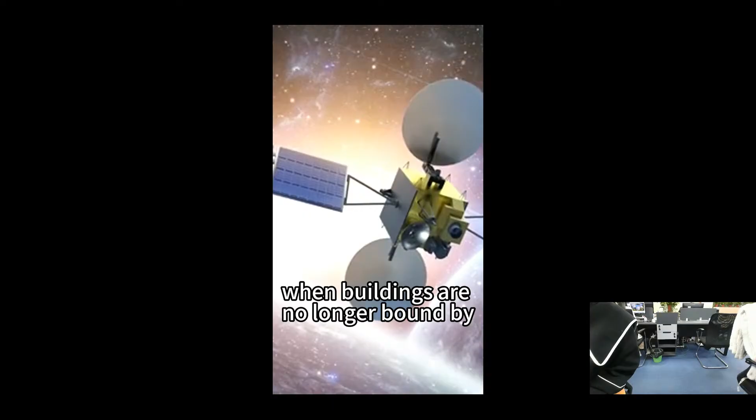When mankind's imagination of space breaks through the boundaries, when buildings are no longer bound by traditional structures, how to use the skeleton of steel to hold up freedom up to 100 meters. From industrial factories to stadiums, from transportation hubs to cultural landmarks, LF has been deeply engaged in the field of steel structure and mesh frame for 30 years.

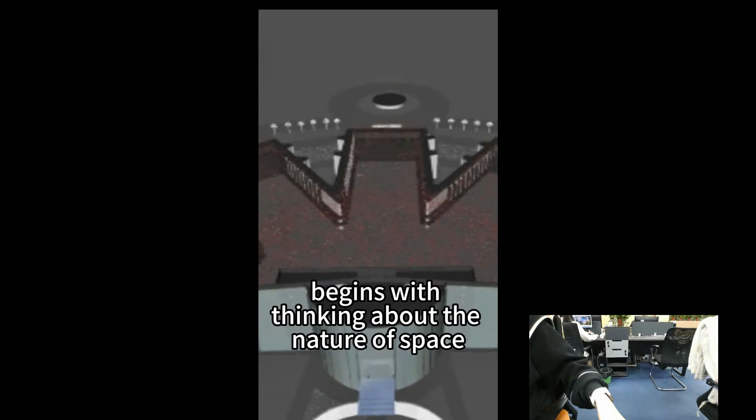We believe that true architectural innovation begins with thinking about the nature of space, removing redundant columns, and restructuring the balance of force and beauty with precise calculations. Each design proposal is a redefinition of extreme span.

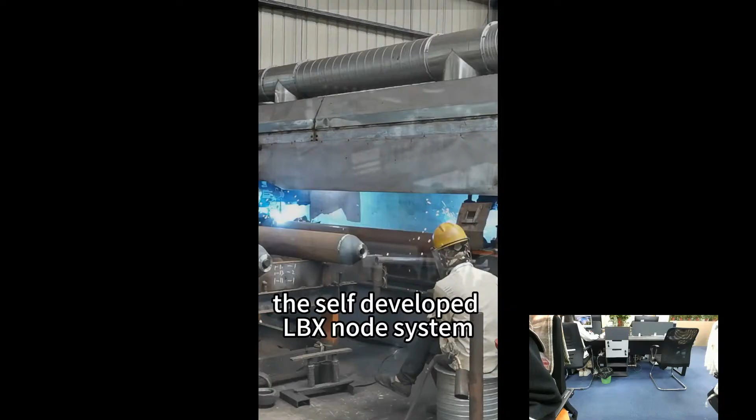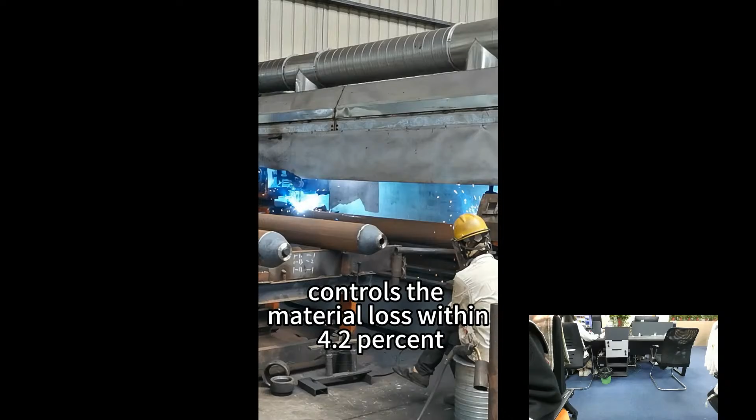The self-developed LBX node system has a bearing strength of 1.8 times that of the traditional process, and the BIM full life cycle management system controls the material loss within 4.2%. This is not only cold parameters, but also our dedication to lean construction, to make every gram of steel carry the mission accurately, and to make every curved surface imply structural rhythms.

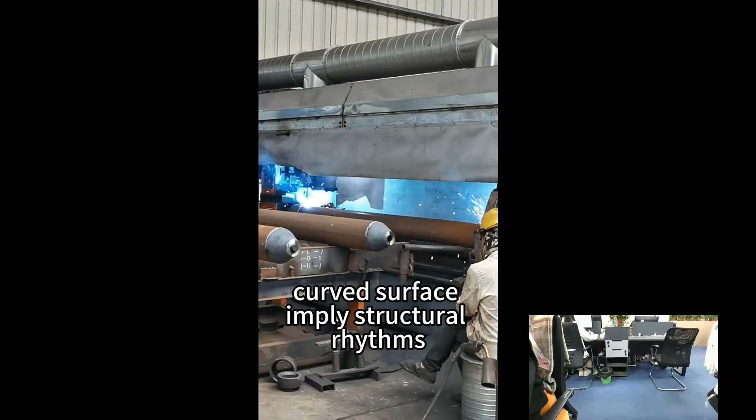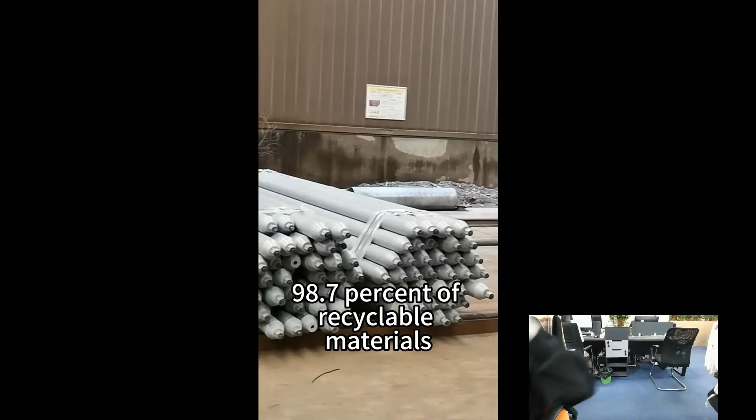When sustainability becomes a necessity, LF's green formula is rewriting the rules of the industry: 98.7% of recyclable materials, 30% reduction in overall energy consumption, and 65 years of full life cycle design. We are proving that the toughness of steel and the gentleness of ecology can be symbiotic and co-prosperous.

From conceptualization to operation and maintenance, what we build is not a simple supplier relationship, but a value alliance across the whole life cycle of the building.

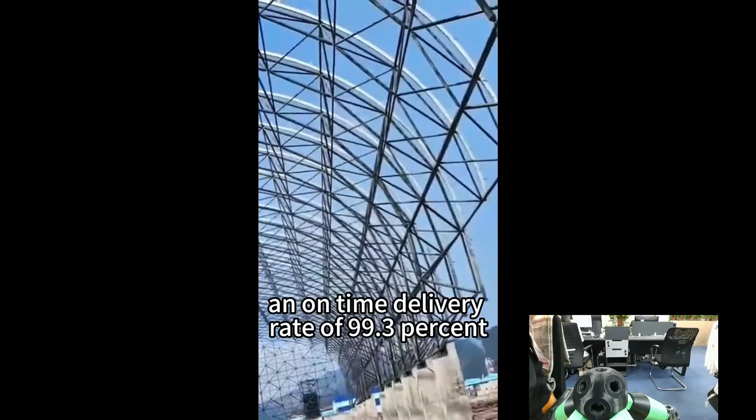217 landmark projects around the world, an on-time delivery rate of 99.3%, and a lifelong traceable digital archive—behind these figures is LF's solemn commitment to architectural timelessness.

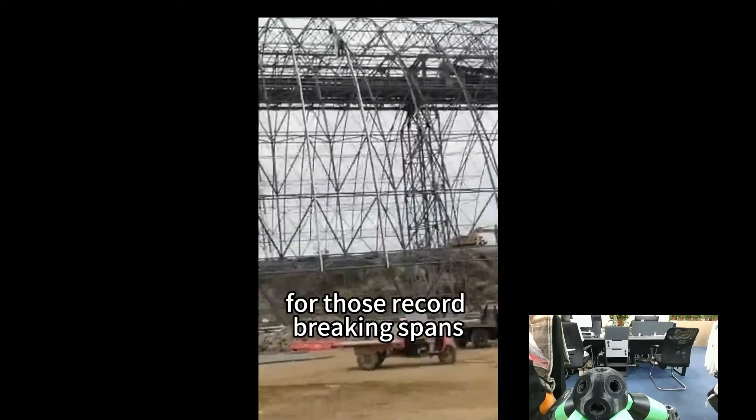When future architects look back on this era, LF hopes to be remembered not only for those record-breaking spans, but also for our consistent perseverance writing spatial poems with steel structures and pouring eternal promises with the spirit of innovation.

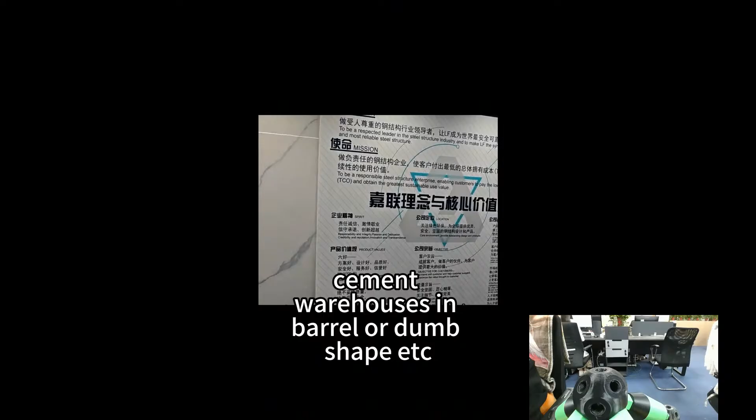LF is especially professional on large-span space frame projects, such as cold storage and cement warehouses in barrel or dome shape, etc. Comparing with traditional H-type steel structure, space frame with large span has more advantages such as more stability, beautiful appearance, and saving cost.

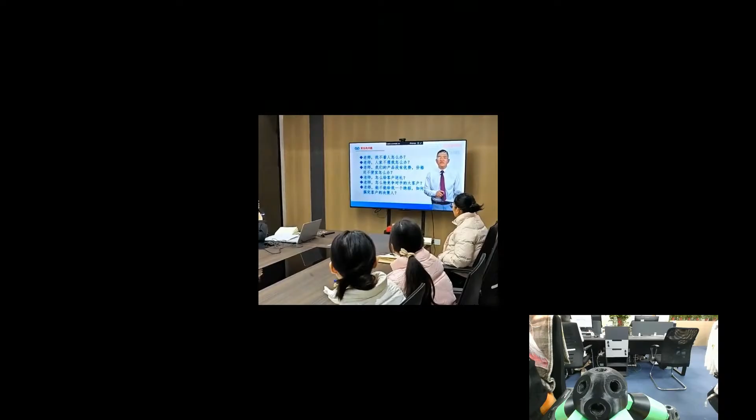LF has been recognized internationally for its expertise in design and construction of space frame structure, domes, and freeform structures, with all products compliant with sustainable building requirements.

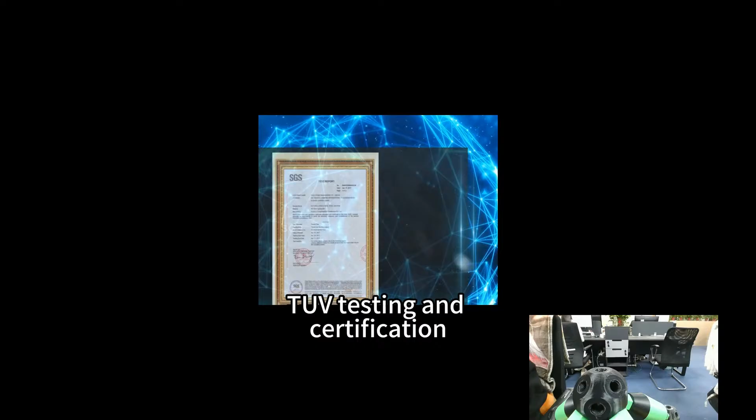Our products comply with SGS, BV, TUV testing and certification, as well as SGS-provided welding process in line with the AWS evaluation. If the customer has other needs of documents and certifications, our documentation staff will further implement the cooperation.

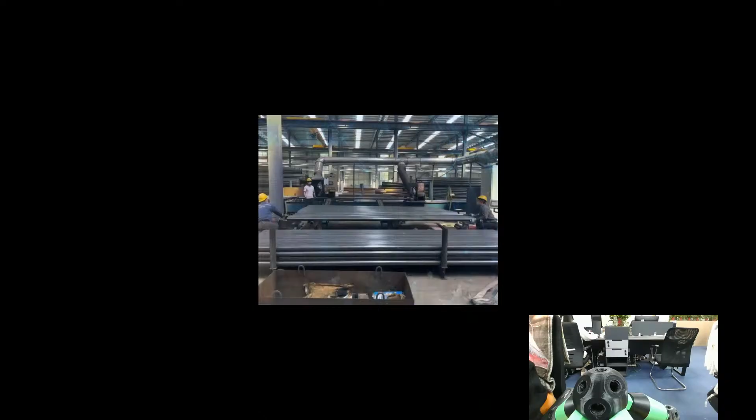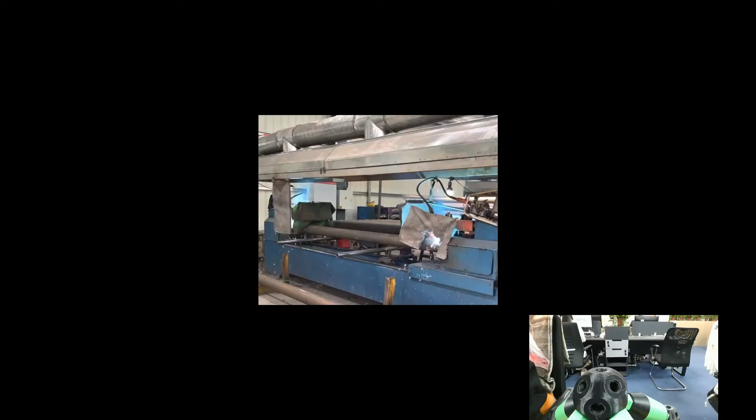All production is completed in the factory, and the components are miniaturized to facilitate transportation, avoiding welding and processing on site as much as possible. Most of our products adopt a small number of welding or other treatment methods. The installation period is shorter, and the requirements on workers are lower. Factory manufacturing can avoid the safety hazards of on-site welding.

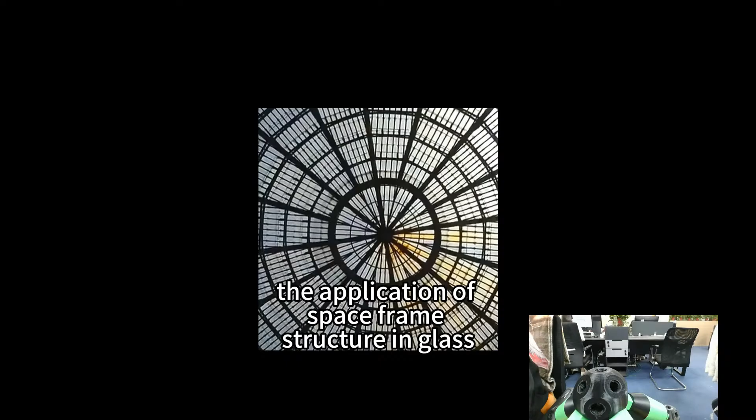Application of space frame structure in glass dome skylights is mainly reflected in its lightweight, efficient load-bearing capacity, and aesthetic visual effect. As the dome skylight needs to cover a large area and bear a large load, the space frame structure can provide evenly distributed force transmission while reducing the weight of the overall structure.

Efficient load-bearing capacity, open space, and flexible design make space frame structures widely used in hangars. The space frame structure has a superior spanning ability, which enables a large span of space in the hangar without interference from columns, and facilitates the parking, maintenance, and operation of aircraft.

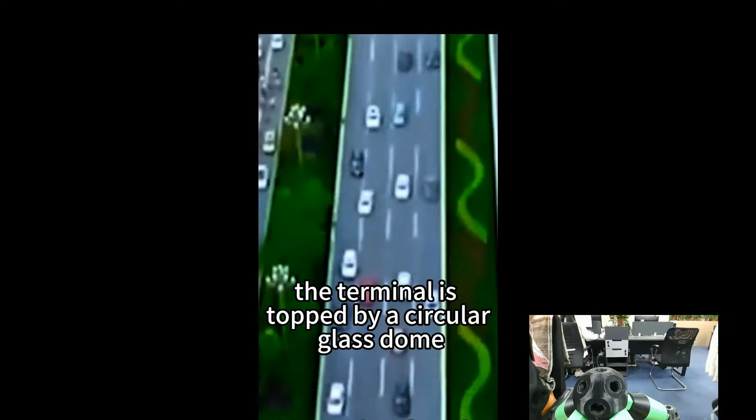The terminal is topped by a circular glass dome, 80 meters in diameter, surrounded by 8 huge C-shaped columns that hold up the entire terminal roof.

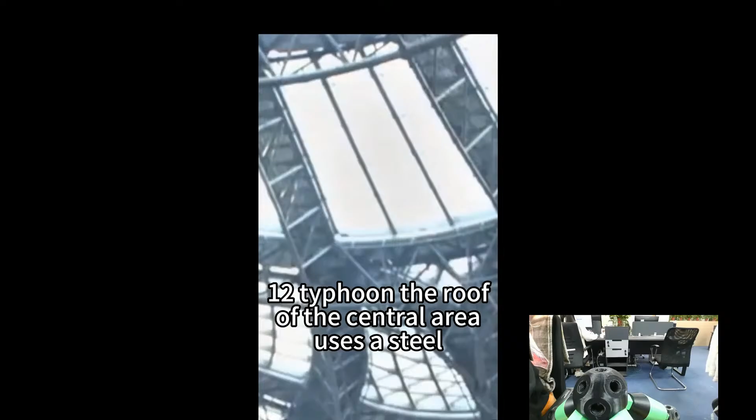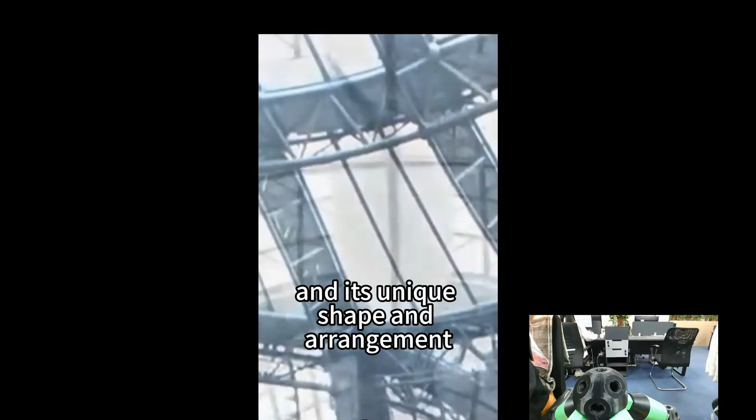These C-shaped columns are surrounded by bubble windows, which are mainly used for lighting and enable the terminal to withstand a Category 12 typhoon. The roof of the central area uses a steel space frame structure, supported by 8 C-shaped columns, 12 groups of support tubes and curtain wall columns, forming a large span roof of 180,000 square meters. The C column is the main support structure, and its unique shape and arrangement effectively transfers loads, providing both vertical support and horizontal stiffness.

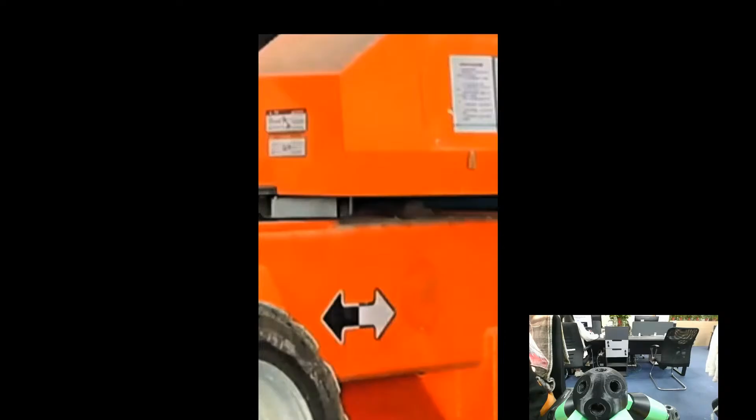Stepping into the museum is like traveling through multidimensional space. The well-arranged space layout is not only the ultimate pursuit of architectural aesthetics, but also a deep tribute to the history and culture of the exhibits. At every step, you can feel the integration of history and modernity. The unique space frame design makes every corner of the museum full of surprises.

The cantilever roof and the staggered beams and columns not only support the weight of the building, but also bear the crystallization of human wisdom. Every detail is a profound interpretation of architectural art.

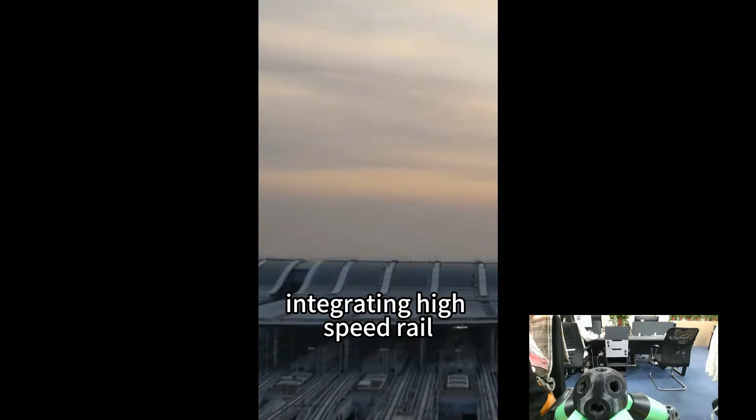Xiong'an High-Speed Railway Station is a comprehensive transportation hub integrating high-speed rail, intercity railway, subway, bus and other modes of transportation. In the video, it can be seen that the platform layers are scattered, and the high-speed train shuttles through them like a silver dragon, efficiently connecting Beijing, Tianjin and other parts of Hebei province, greatly shortening the time and space distance between the cities.

The supporting facilities in the station are perfect, from intelligent security check, face recognition, to automatic ticketing, information query. Every detail reflects the humanistic care of science and technology, which provides great convenience for passengers.

The steel structure project of Xiong'an High-Speed Railway Station is a frame structure system with a total steel consumption which exceeds the total steel consumption of the Bird's Nest stadium, and is the leader in the steel structure consumption of large domestic transportation hubs.

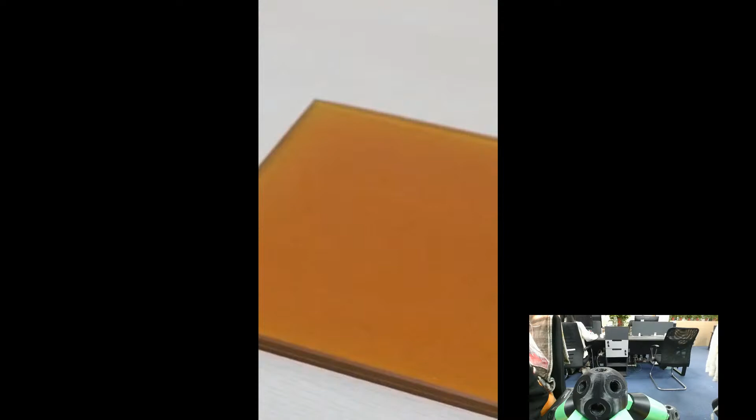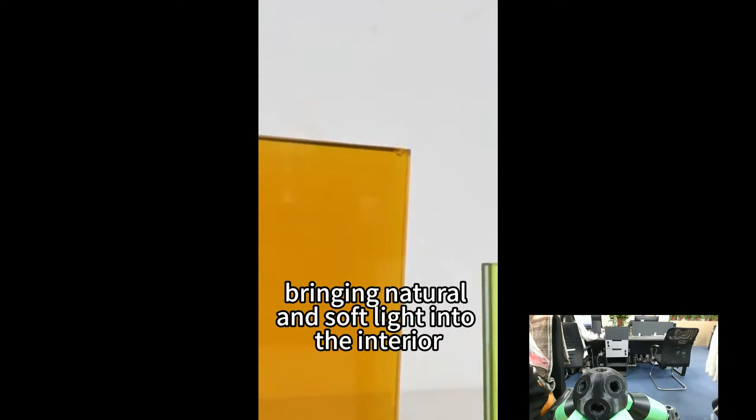Glass dome is usually made of tempered laminated glass, ultra-white glass and other high-strength, high-light transmittance materials with high transparency, good appearance, lightweight and other advantages. The glass dome is able to change with the skylight, bringing natural and soft light into the interior while reducing the use of indoor lighting and air conditioning, saving energy.

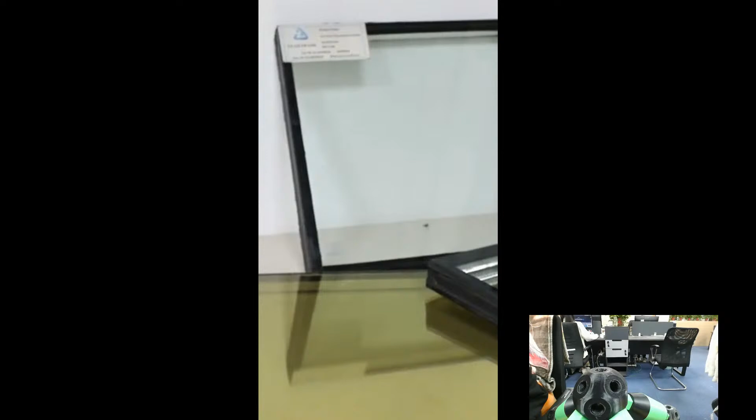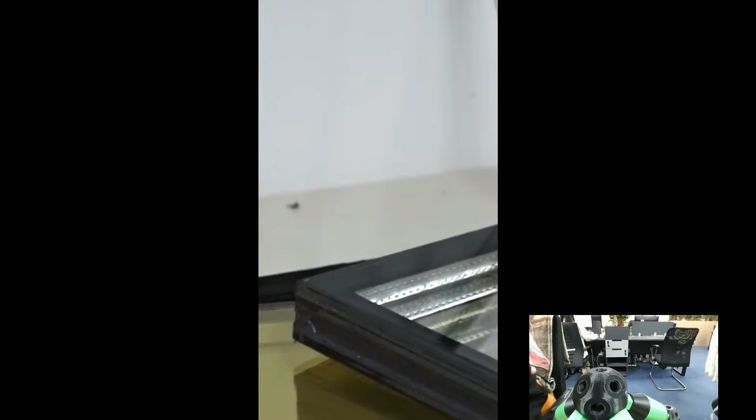Now let's look at some of the details.

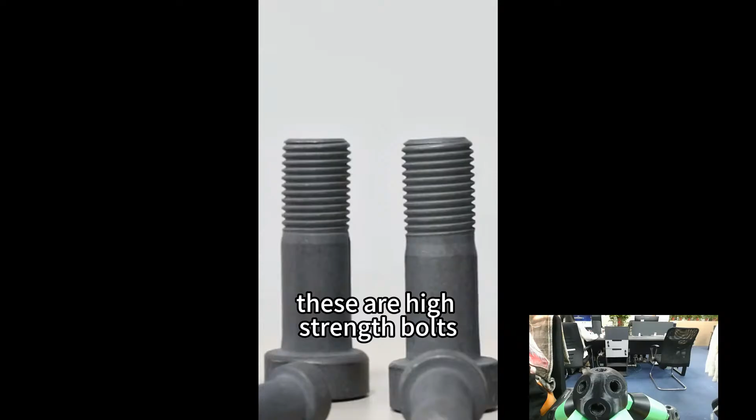These are high-strength bolts. The role of high-strength bolts in the space frame structure is mainly reflected in the connection fastening and enhancing the overall stability.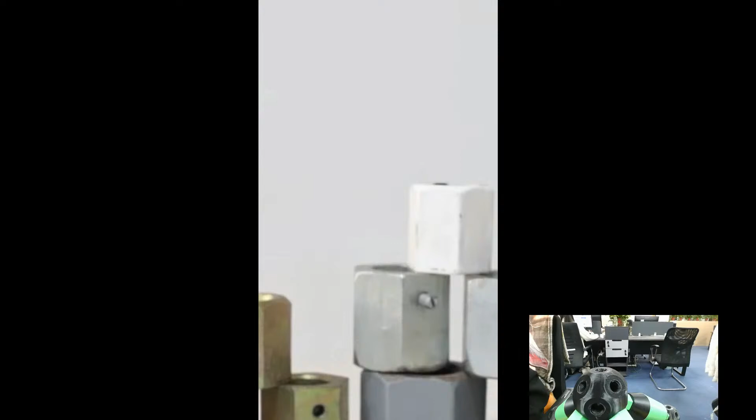These are sleeves. The sleeve is mainly used to connect the steel bar, which is to connect two or more steel bars through the sleeve to form an overall structure.

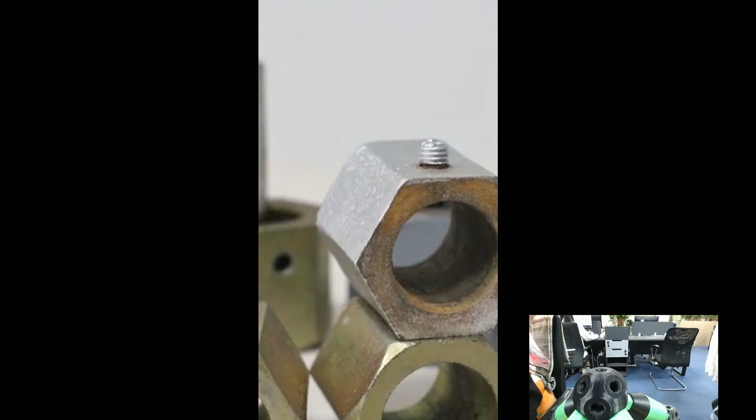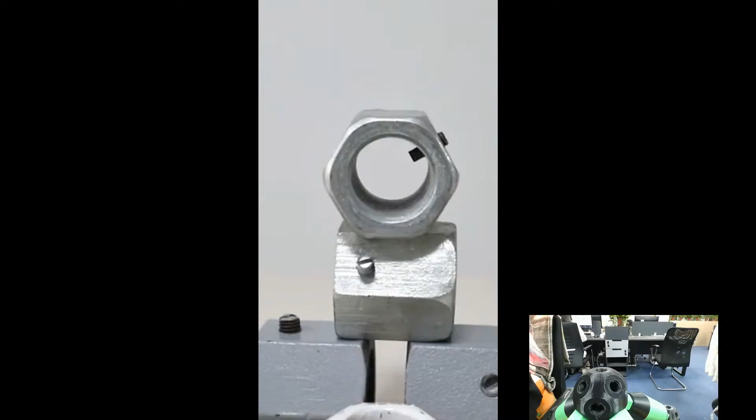LF spaceframe installation.

Step 1. Preparation of spaceframe components.

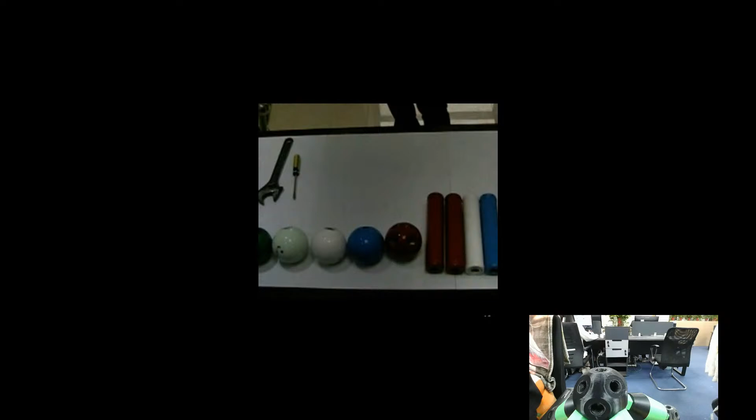Step 2. Pull out high-strength bolt from steel pipe.

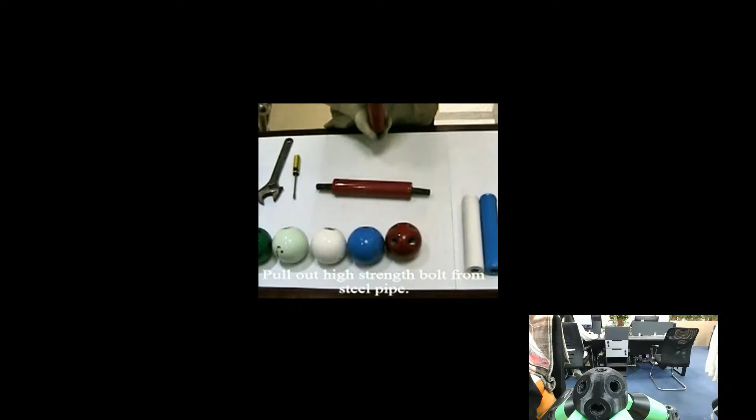Step 3. Install sleeve on high-strength bolt.

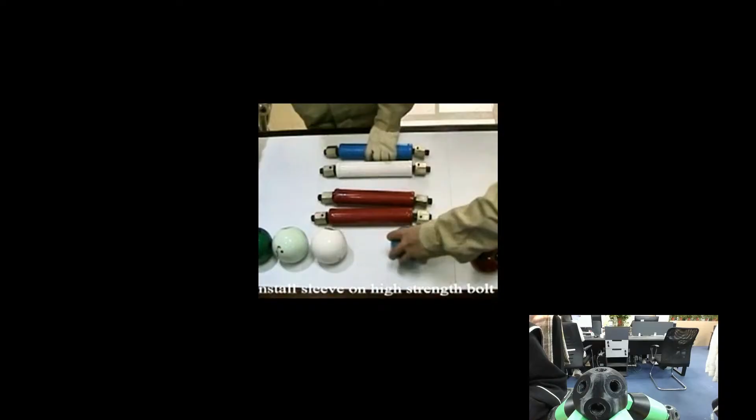Step 4. Combination installation of steel pipe and ball.

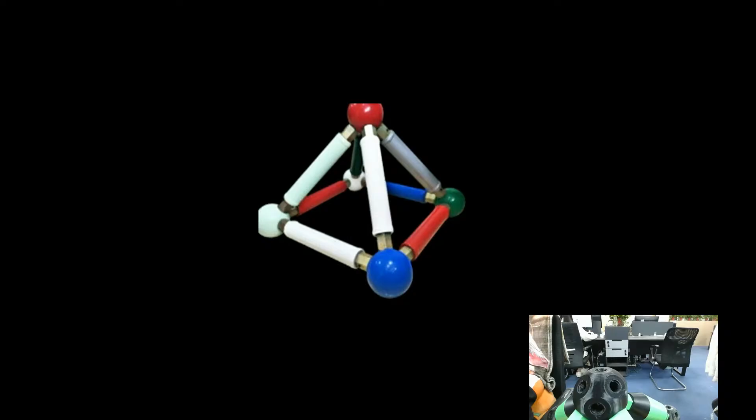This is a demonstration of gas station shed roof installation process.

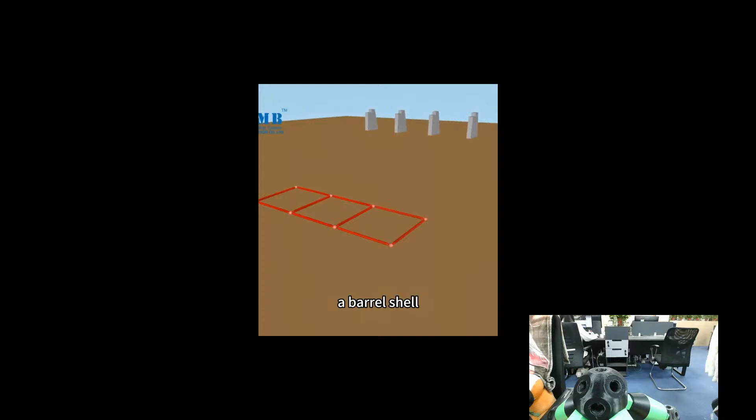A barrel shell is a shell with a barrel-shaped appearance or barrel-shaped structure. Shell is a kind of structural form with curved shape and thickness much smaller than other dimensions, which can bear large loads and has good stability.

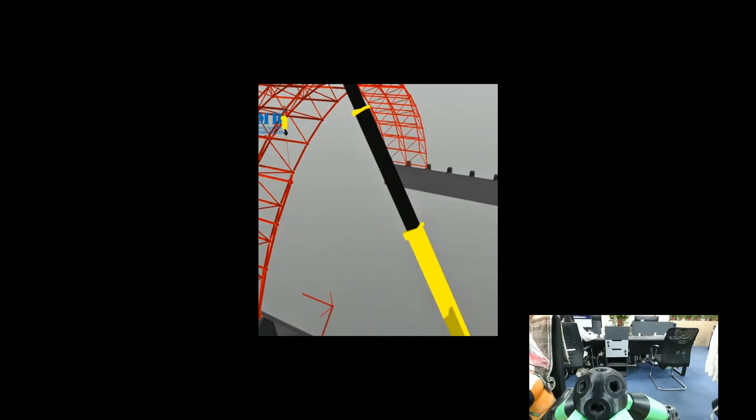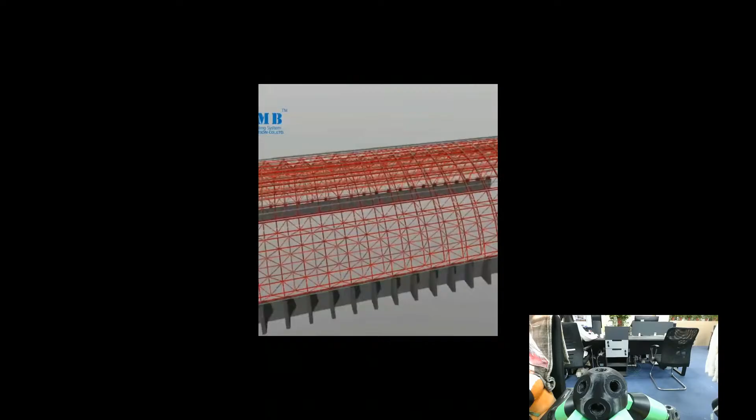This is the dome space frame structure coal bunker installation display. Dome coal bunker is mostly used in vertical large capacity coal bunker, and its structure can disperse the pressure evenly, so the stress performance is better.

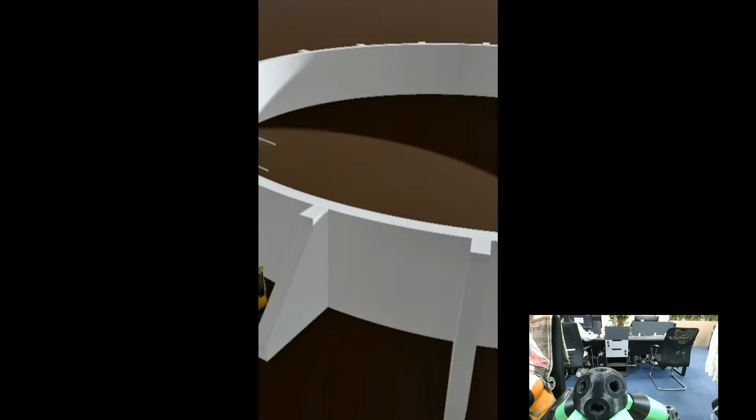The design of dome coal bunker makes full use of its internal space, with high section utilization rate, which can store more coal. In addition, the construction of dome coal bunkers is relatively simple, and due to its structural characteristics, it is also easier to maintain.

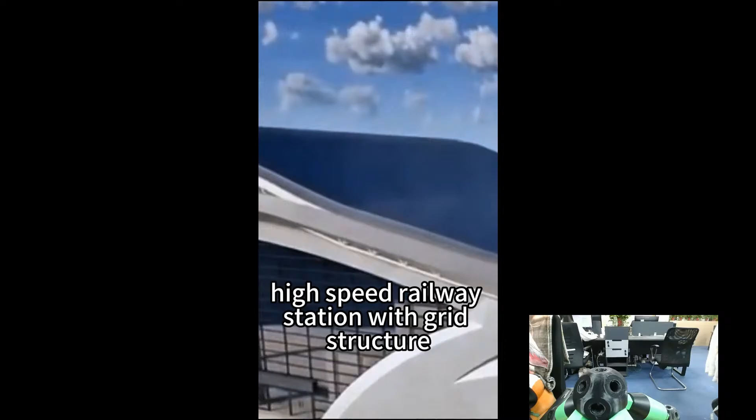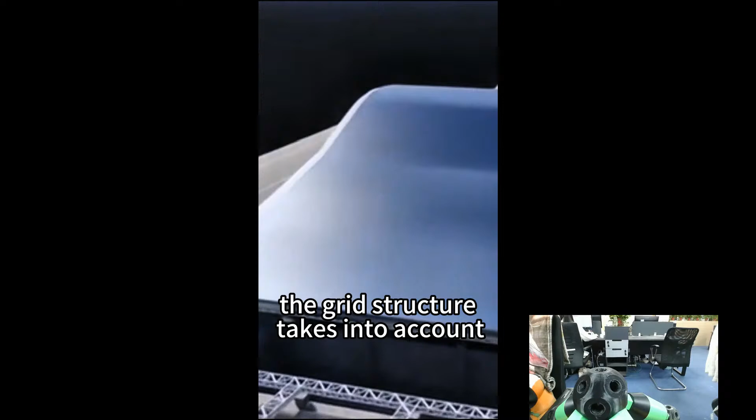High-speed railway station with grid structure is not only the core of transportation, but also a new name card for city development. From the exterior styling to the interior layout, the grid structure takes into account both functionality and aesthetics. The scientific mechanical design is wind and earthquake resistant and durable, providing a solid guard for the high-speed rail station.